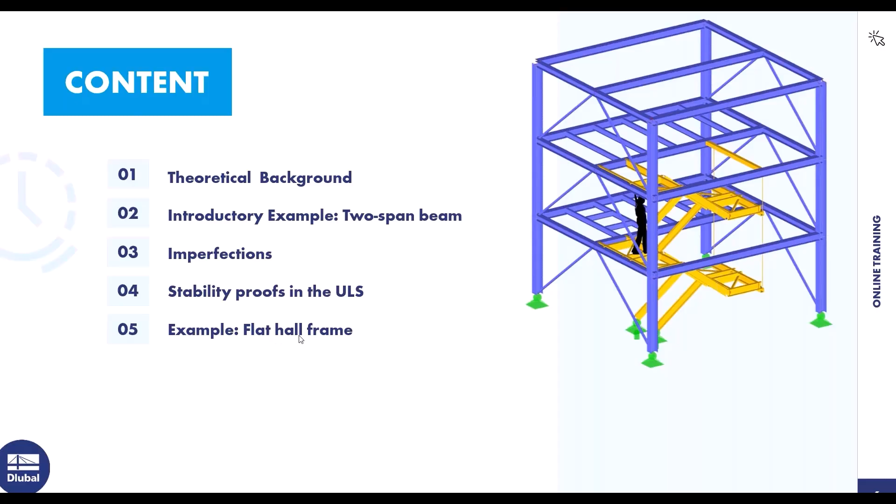So, okay. First, I'll say something about the products for the design according to EC3. The most important add-on is the Steel Design add-on. With that add-on, you can design steel members according to international standards like Eurocode, AISC, and so on.

We calculate or design according to Eurocode today. Then there's the add-on Torsional Warping. With that add-on, you can consider the 7th degree of freedom and the torsional warping. Then Steel Joints - with that add-on, you can analyze steel joints based on the finite element method.

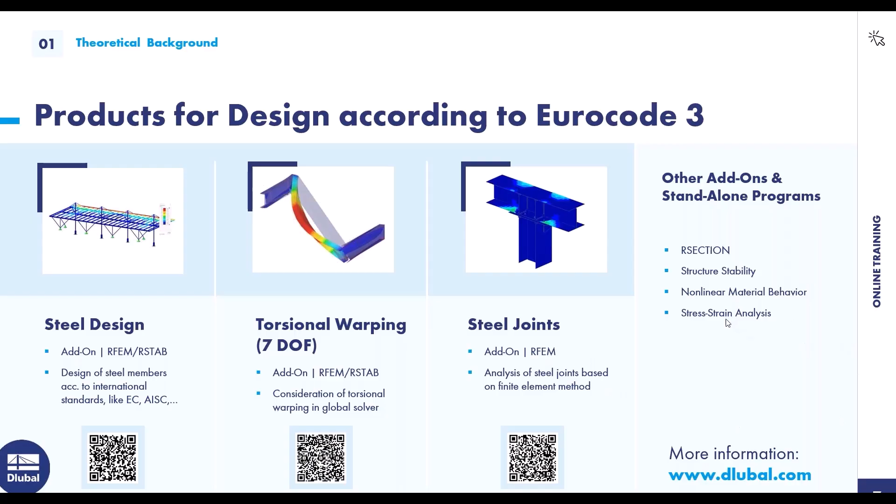Then there's the cross-section program, RSECTION. Then the add-on Structure Stability - we use that add-on in the second example. Then there's the add-on Nonlinear Material Behavior. You can, for example, consider a plastic design of steel plates and so on. And then there's the add-on Stress Strain Analysis.

Okay, then a little insight into the whole safety concept in steel construction. The actions should always be smaller than the resistance. Those are the actions, this is the resistance. And in addition, we have certain coefficients that we have to take into account depending on what type of proof is used. You can see the different coefficients here, and those are the coefficients for the German national annex.

You can see there is, for the stability analysis, another coefficient, the safety coefficient. But if you select the German national annex, for example, or another national annex, this coefficient is considered automatically by the program.

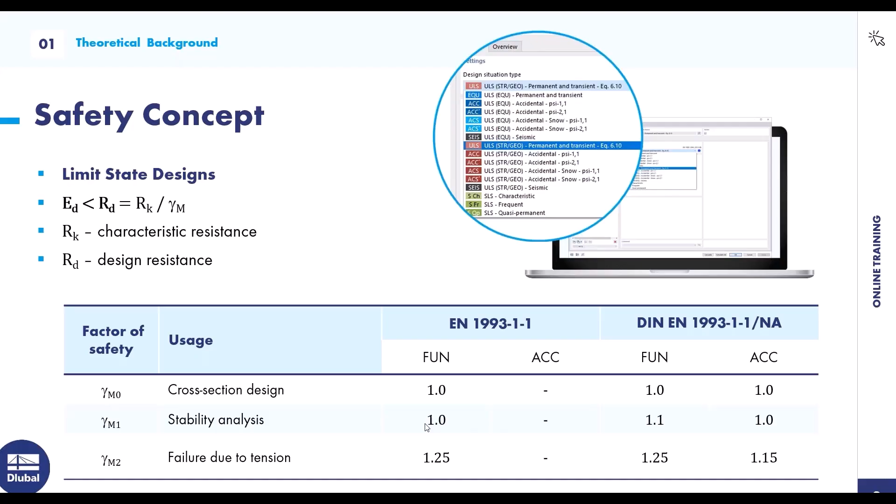So, okay, then the next slide. Elastic or plastic global analysis. Whether an elastic or plastic calculation is possible always depends on the cross-section classes. There are 4 cross-section classes. In the first cross-section class, there is a high rotational capacity, and this allows a plastic structure calculation.

Now, for example, you can consider plastic hinges, but it's not so often used in practice. And the cross-section resistance can be applied plastically. Cross-section class 2, where there is a low rotation capacity, allows an elastic structure calculation. And as with cross-section class 1, the cross-sectional resistance can also be applied plastically.

The first and the second cross-section class, where you can consider a plastic cross-section resistance. Then cross-section class 3 and 4 allow an elastic structure analysis, and the cross-sectional resistance can only be applied elastically. For cross-section class 4, only a reduced cross-section resistance, the effective cross-section.

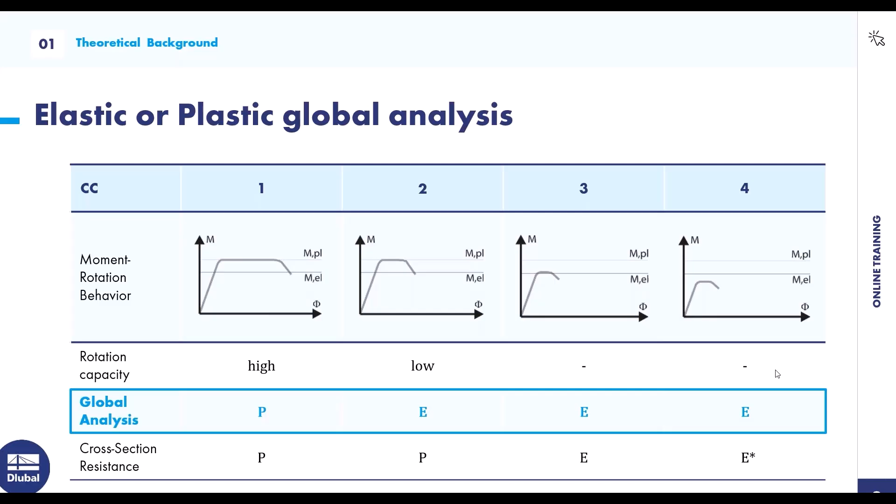That's the first example, the two-span beam, with a field length of 12 meters left and 12 meters right. A beam IPE 550, steel S235, a self-weight load case, and a load case with an imposed load. And we will calculate or do a cross-section classification, cross-section design checks.

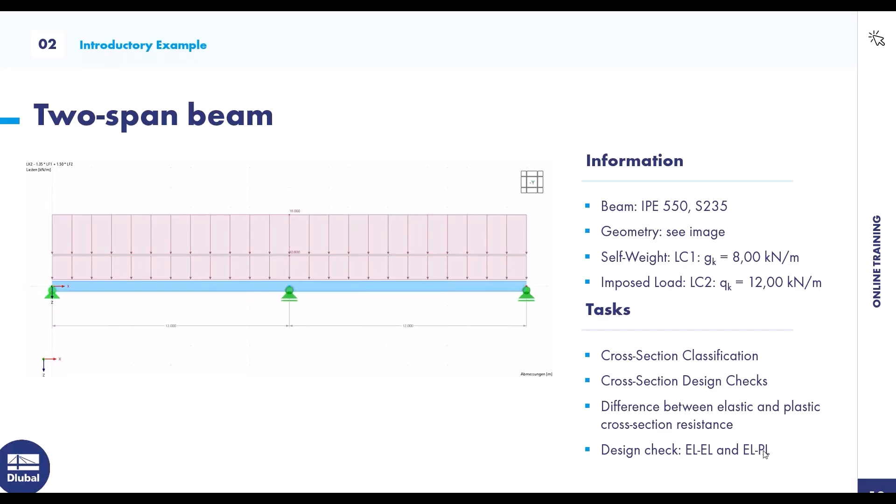The difference between the elastic and plastic cross-section resistance. We take a look at the design checks: elastic, and elastic-plastic. Okay, I turn to RFEM. That's the second example, it's already prepared. But for the first example, I model the complete structure. File, new.

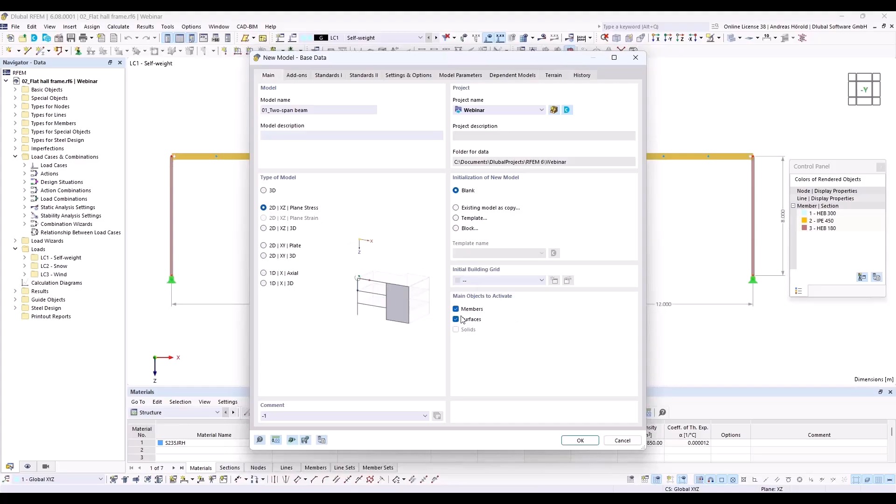So I enter 01 two-span beam. Then type of model 2D is sufficient. We consider only members, but you can also select surfaces. That doesn't matter. And we select the steel design add-on.

Then we need to select the standards. You can see there are, for the load case classification and the steel design, different international standards. We select the Eurocode, and for today we are in Germany here, we select the German National Annex.

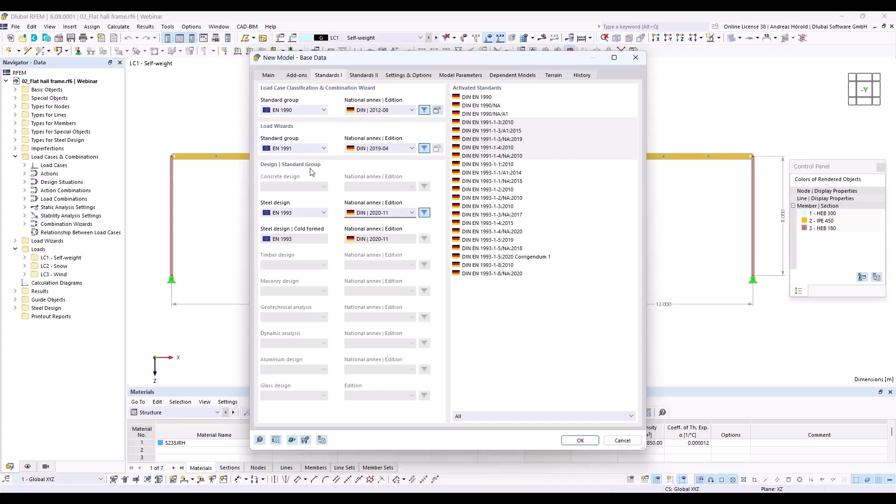We don't use the load wizards, but we use the load case classification and the steel design. We leave the dialog with OK.

So I turn to the view -y, move it a little bit. So the grid is 1 meter. I leave that. If you want to change that, you can click on this here at the bottom, display grid, right click and then edit. And you can change the space for the grid points.

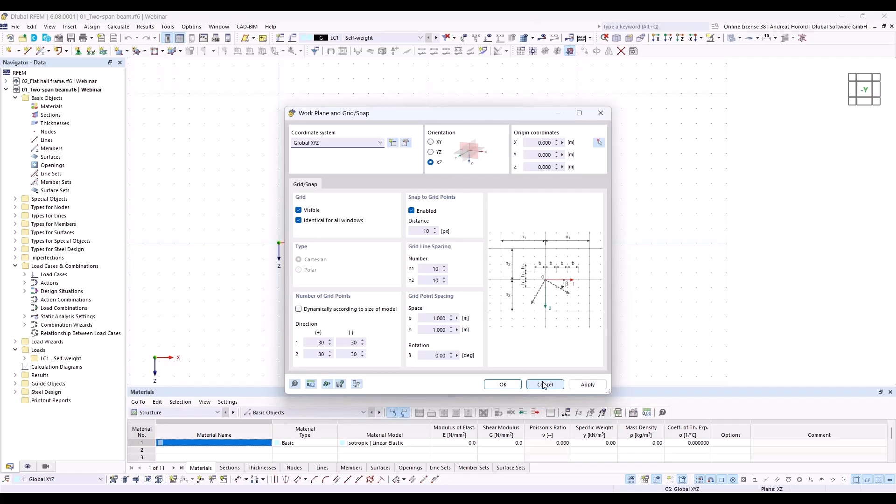So I start with the beam. Here, left above, new single member. I need to define a section. Create new section. I turn to the library.

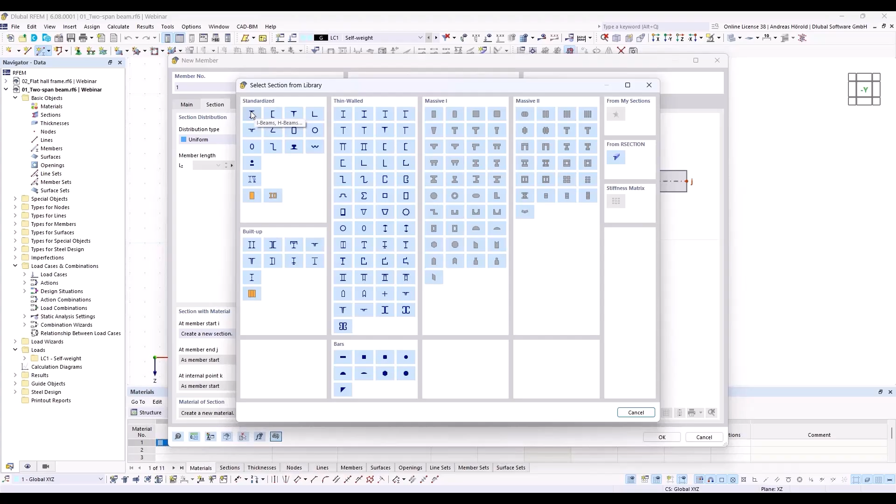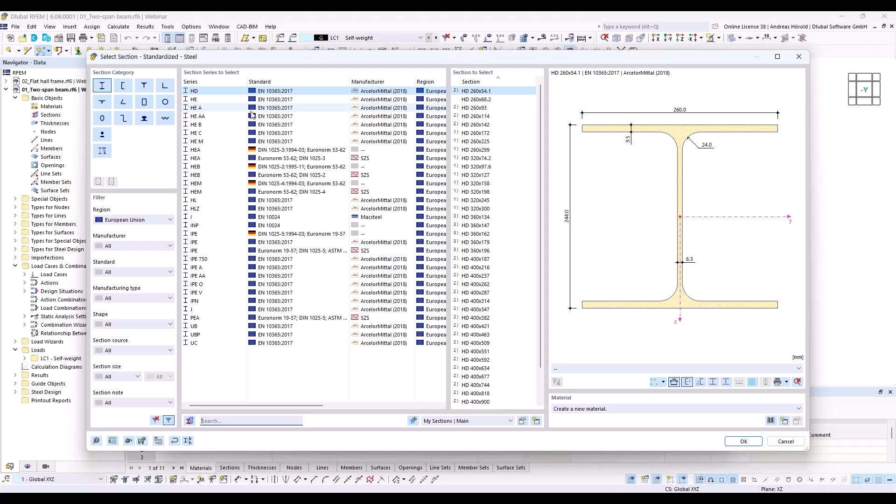Left above, an I-beam. If I am too quick for you, that doesn't matter. There is a recording. When you want to enter the structure by yourself, you can use the recording and the finished models. In the next days, you will get an email with the recording and the models and so on, the PowerPoint slides. Just take a look at what I show.

That's sufficient. Okay, I select IPE 550, and right at the bottom I open the material library and I select European Union, steel, carbon steel.

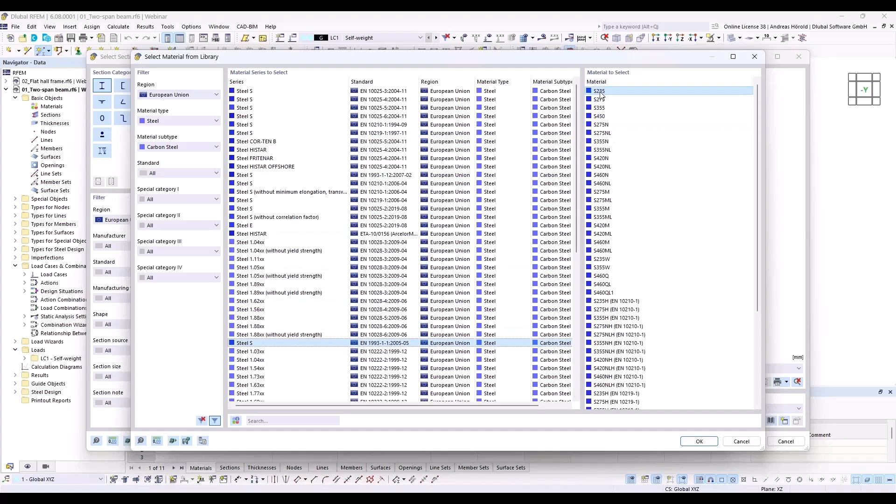There are a lot of steel materials. I use the steel material S235. Okay, you can see now the color is blue. That's okay.

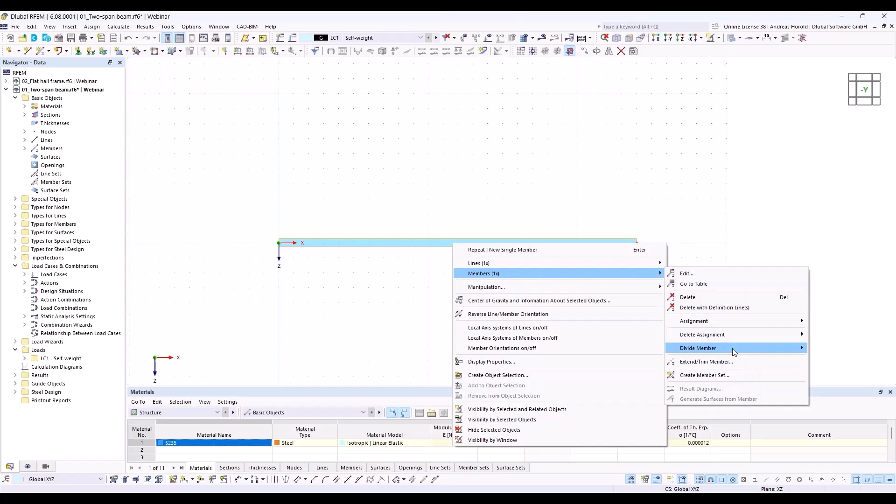So I create a member with a length of 24 meters and I divide the member in the middle with right click, members, and divide member and intermediate nodes. One intermediate node, and that I create the node without dividing the member. I select this option here, create on member nodes without dividing member.

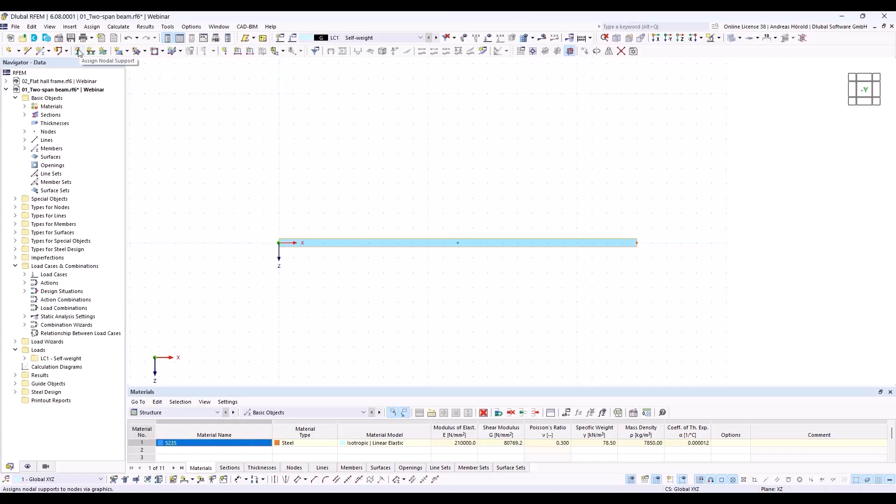Okay, there's the node. So then I create the supports. Here left above, assign nodal support. So I press the edit button to take a look if all is okay. Yes, we support in an X direction and in Z direction.

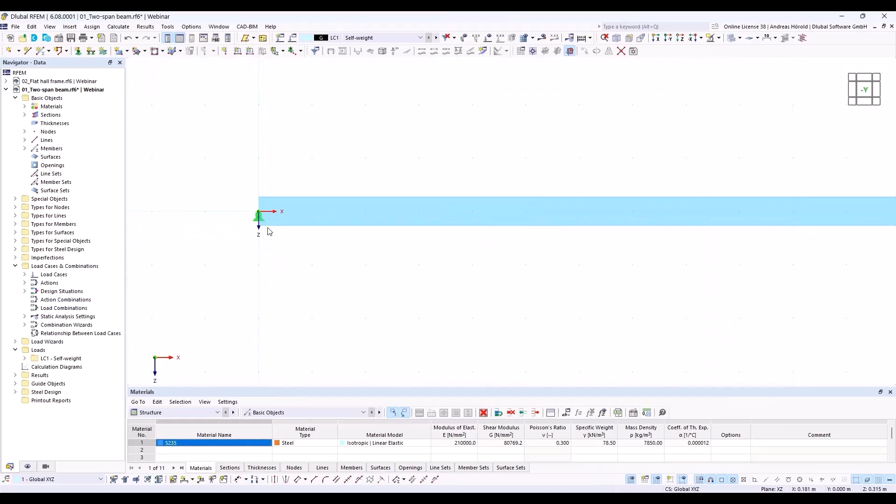Okay, and this node is quite a little bit small. With a right click, I can increase the size of the support. Okay, that's enough.

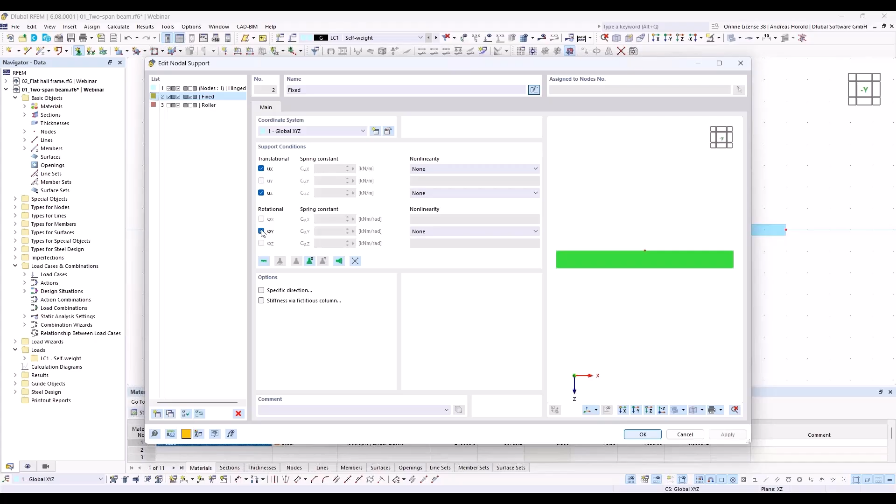So next support, I select the second support and press the edit button. We don't want to fix the rotation for the support, and we deselect the fixing in X direction. We only want to support the member in Z direction. Okay.

So that's all for the model. I create the loads. There's a self-weight load case. I select the edit active load case. The self-weight load case is automatically created for every model. So, and you can see also the self-weight of the structure is activated. That's correct in our case.

So, and above, this button, new member load. And our load should be a force, uniform. You can see there are different options. And the load direction should be in Z direction, in this direction. So and the load magnitude should be 8 kilonewton per meter.

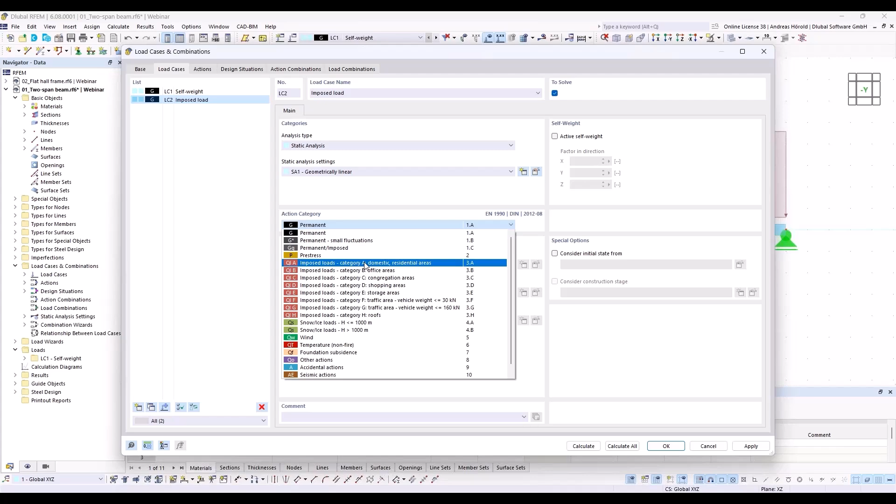Okay. So then I create a new load case with that button. I call it imposed load. And I select the action category, not permanent, but imposed loads. Okay.

Okay. Then I have to create the load for this load case, new member load, and this time 12 kilonewton per meter. Okay. That's all for the model and for the loads.

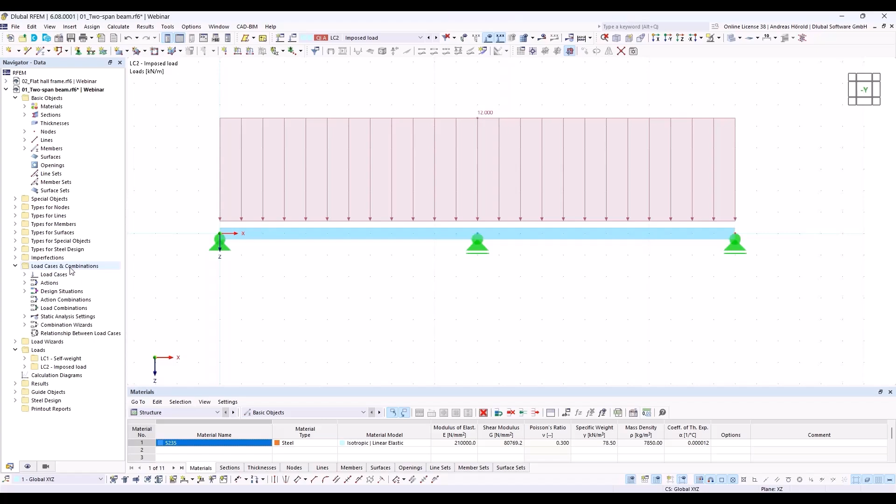I open the load cases and combinations dialog again, this time over the navigator data with a right click. Load cases and combinations. There are the base data. Now, at the beginning, we selected the standard group Eurocode and the German national annex, and we activated the combination wizard. Those are my two load cases.

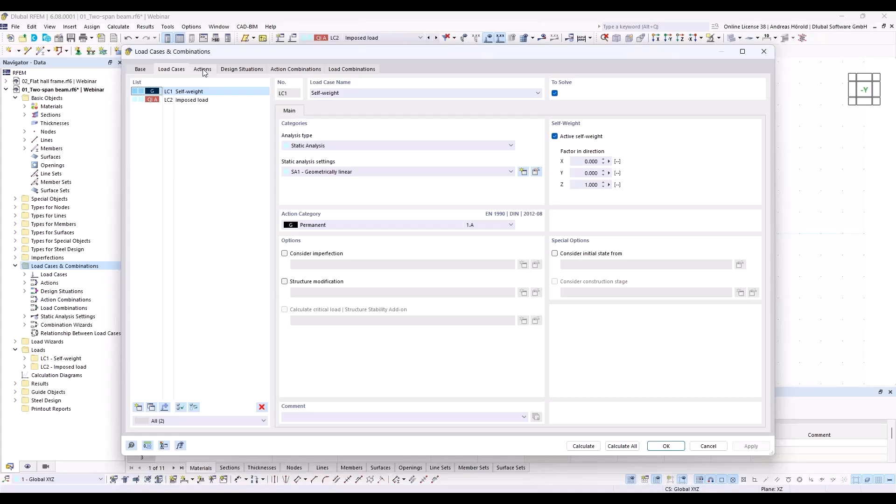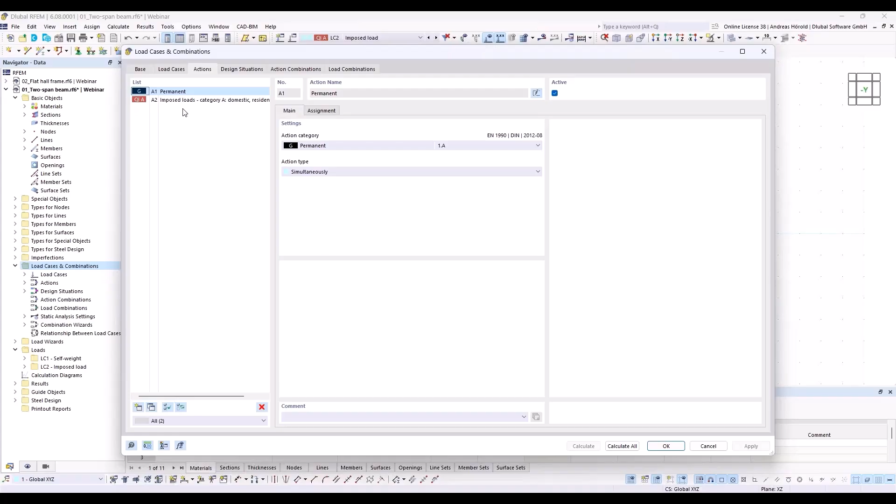We've got only two actions. Now, that's quite important when you have, for example, 4 wind load cases. Then there's only one action for the wind load cases. And yeah, you can combine in the load combinations either wind in -x or wind in +x and so on. Okay.

So then there are the design situations. We would like to design only according to ultimate limit state. That's why I delete the design situations for the serviceability limit state. And what's important, we need to activate the steel design.

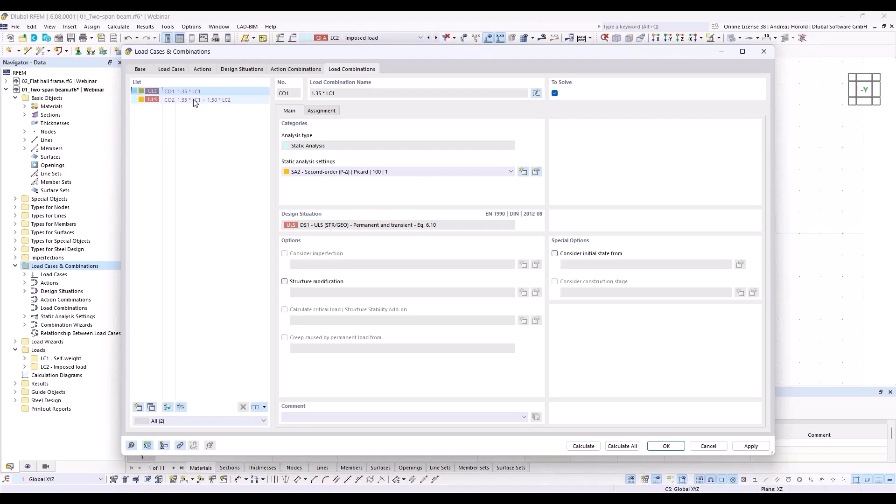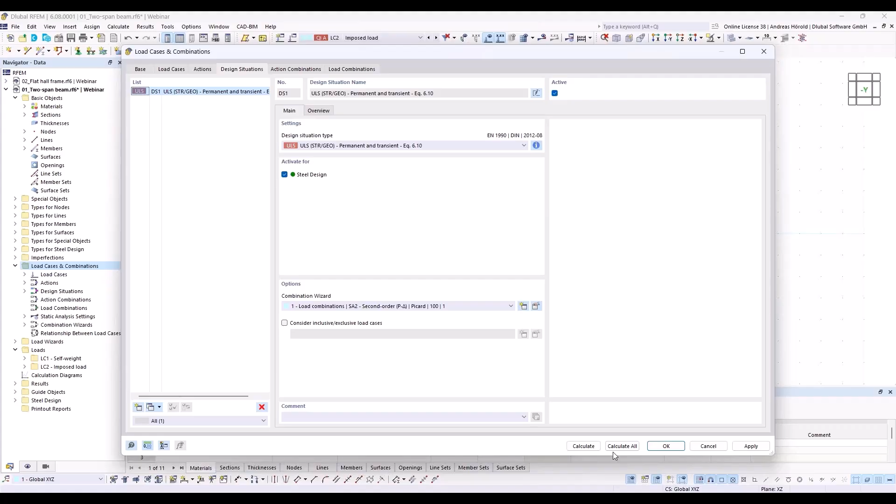So, and there are only 2 load combinations. And if I turn back to the design situations and to the overview, there are assigned these 2 load combinations for the design situation, ultimate limit state design. So then we can calculate also the steel design.

At first, we take a look at the internal forces and the navigator results on the left side.

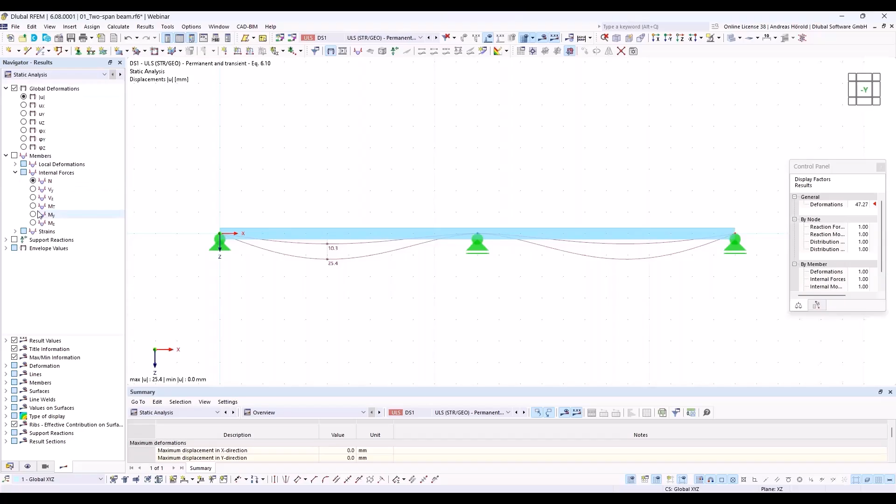The VZ, for example, I can also select only the maximum values, not minimum and maximum. So VZ and MY.

So, and then we can go to the table at the bottom and to the steel design. An error is displayed after the calculation. This is because we haven't made any steel design settings yet. We are only interested in the cross-section verification here. Therefore,

we change to the table design ratios and members. So there's the section proof for shear and for bending, and you can see a plastic design was done for the program.

So if I select the line and press this button, design check details, this dialog is opened. Students' request for a detailed presentation of the proofs is now possible. You can see the equations and where you can find it in the standard.

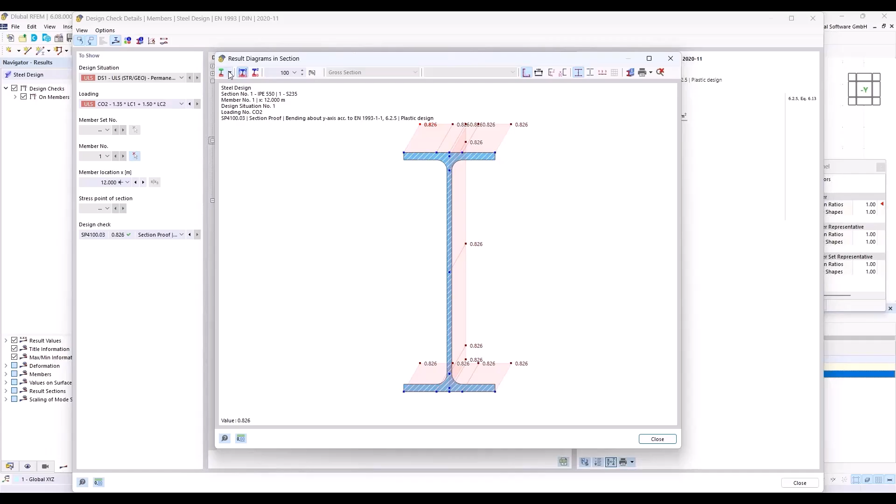So we can also take a look at the result diagram, the design ratio, the stresses. That's the stress in the middle, or over the middle support, and where is tension at the top and compression at the bottom of the cross section.

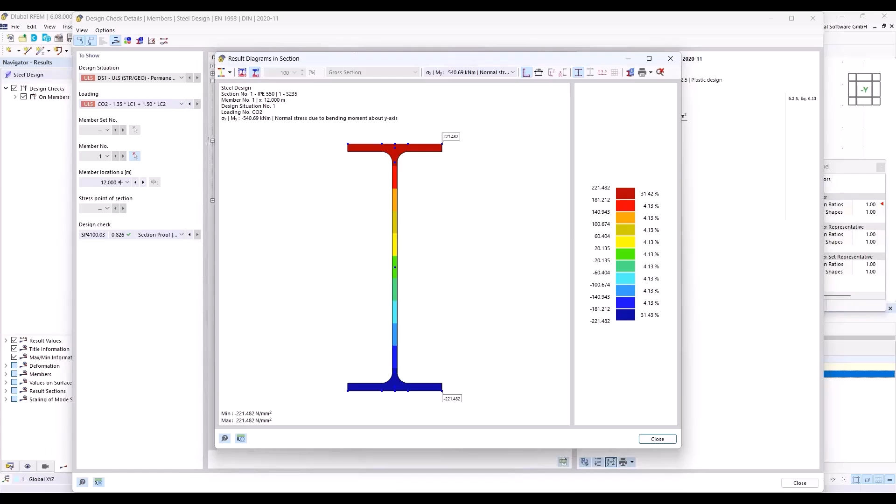So yeah, okay, that's all. Can I show also maybe the cross section information, the stress points, the different sub panels for the cross section classification, the C to T parts. Okay,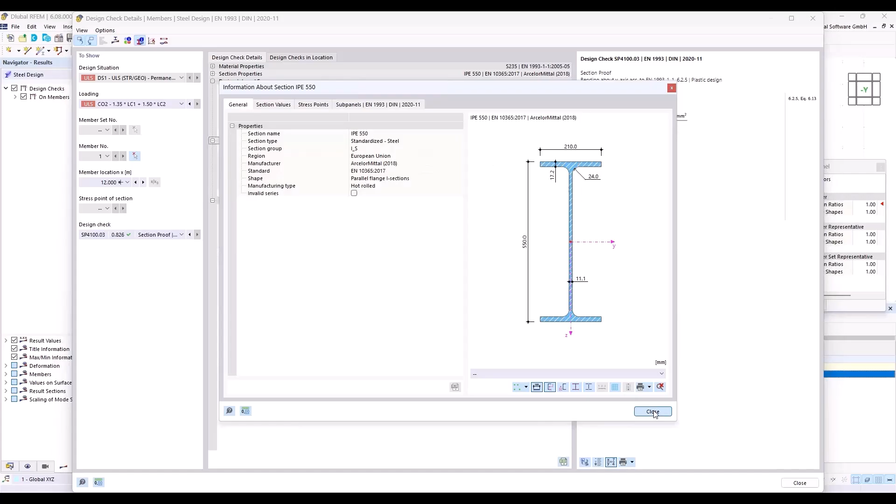that's all. Yeah, and the same, you can also, if you want to check the proof for the shear, either press that button or double click on the line, and you can see the equations from the standard.

Okay, now we don't want to do a plastic, but an elastic design. How to do that? I turn left at the bottom to the navigator data.

Then I open the steel design folder and the ultimate configurations, and I double click on it. Yeah, and then I can, for example, uncheck the stability design. Then this error message doesn't appear, but it doesn't matter.

I select that button here: elastic design also for class 1 and class 2 sections. It's allowed to do a plastic design for class 1 and 2, but in this case we would like to do an elastic design also for the cross-section class 1. In our case, the cross-section is cross-section class 1.

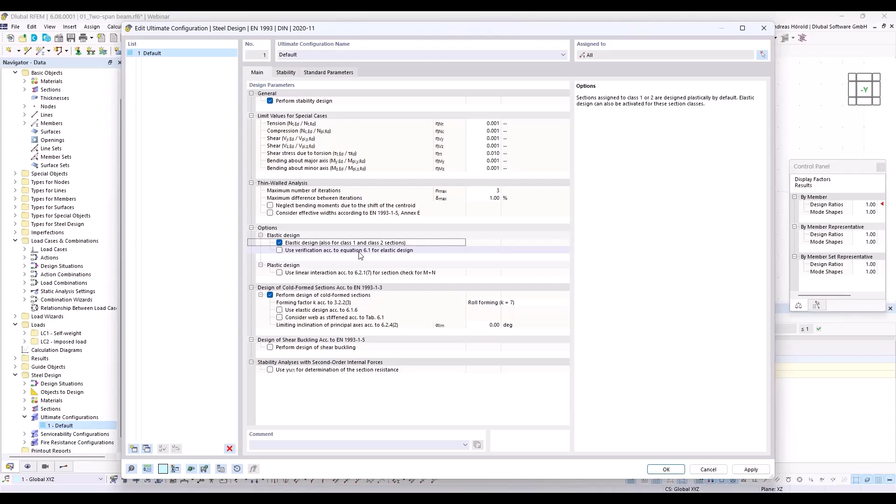Okay, we calculate or rerun the steel design again, and I select design ratios and members. I remember we had a design ratio for the plastic design of 83%, and now we have got 94%, because we do an elastic design. And if I double click on it, I can see the equation.

Okay, what you can hold in your mind is that we can do every time an elastic design. We can consider the elastic cross-section resistance. That's what we did in the second step, in that step here.

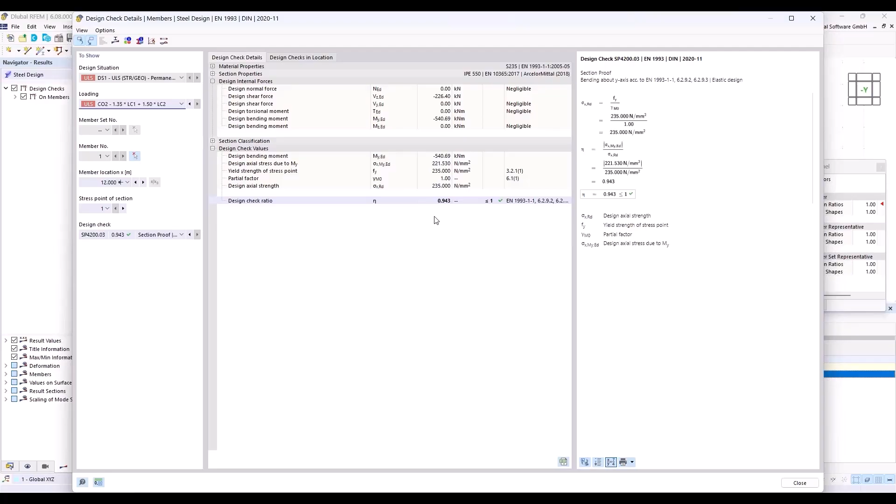So we have now learned how to carry out a cross-section check and how to take the elastic and plastic design into account: first the plastic design, in the second step the elastic design, because elastic design is allowed for all cross sections. And in addition, we now know how to display the design formulas and compare them with our own manual calculation.

Then we turn to the next topic for today: effects of deformed geometry of the structure.

In the first training course, Introduction to Member Design, it was learned how the results can differ between the calculation according to the first order theory, the geometrical linear analysis, and the second order theory. The geometrical linear analysis is an equilibrium formation on the undeformed system, and the second order analysis is an equilibrium formation on the deformed system.

In this example of the cantilever column, this effect can be seen very well on the basis of a slender and a compact cross-section. In the case of the slender column, the increase in the bending moment at the foot point is much larger than in the case of the compact column, if one calculates according to the second order theory. And there's no difference when you apply the geometrical linear analysis.

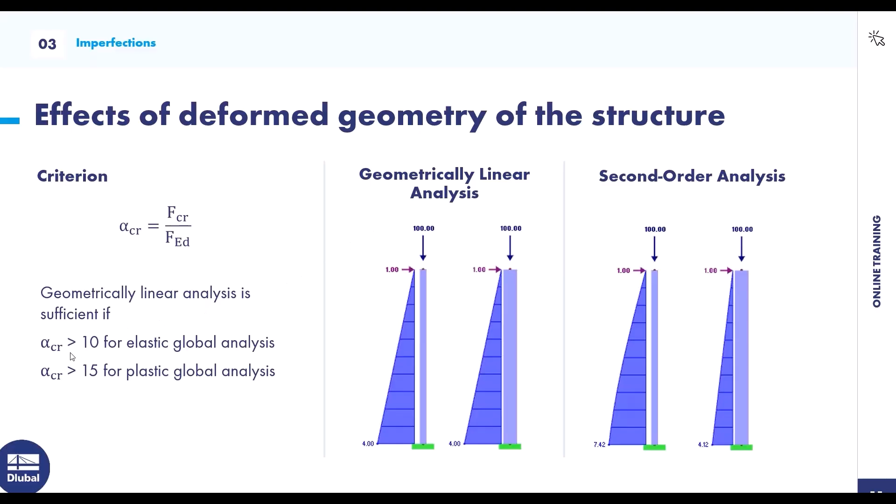Okay. So the next point is the equivalent geometric imperfections. Imperfections are also closely related to this topic. In Eurocode 3, these are generally grouped together as equivalent geometric imperfections. What are imperfections anyway? Imperfections are production-related deviations in the model geometry and/or in the material properties.

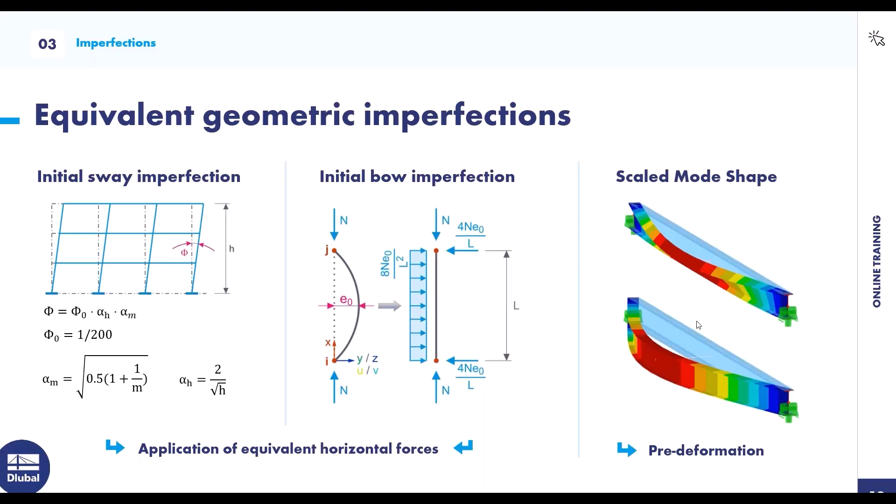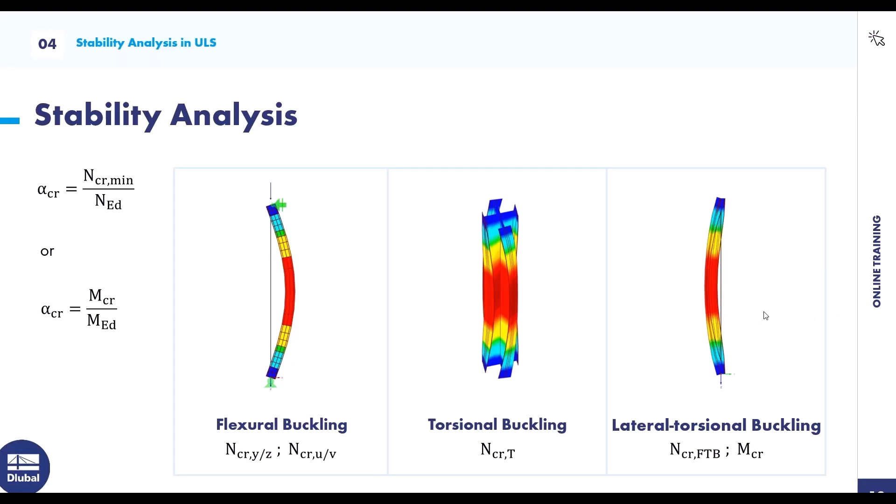Okay, methods for stability analysis. There are 3 methods. Method A: you have to apply a global and local imperfection, and the structure analysis should be done with the second order analysis. Then you can do the cross-section design checks with the internal forces.

Method B: global imperfection, meaning only the initial sway imperfection. Then the structure analysis according to second order analysis. And what's quite important, you have to consider the buckling length equal to the member length, not with a factor. SK is equal length.

Then method C: structure analysis according to geometrical linear analysis on the ideal structure, but in that case with the real buckling length.

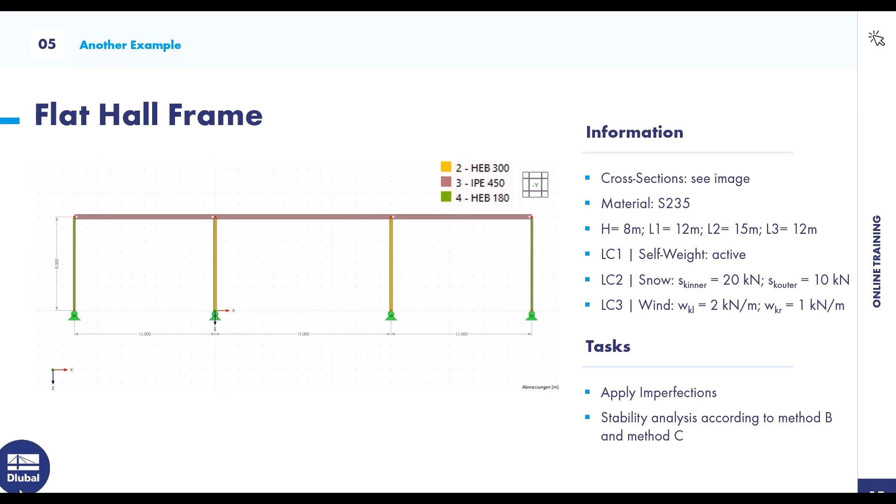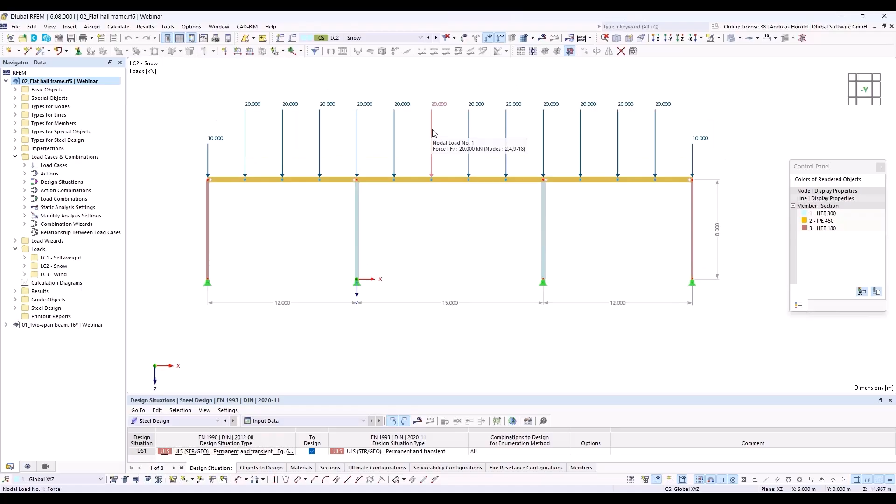So then I turn to the program, to the predefined example. So that's the construction self-weight load case, then a snow load case with loads, for example, from purlins, and a wind load case. Wind in X direction with wind pressure and wind suction.

Left above, I turn to the base data, a 2D model, and we use the add-ons structure, stability, and the steel design add-on. And we select the standards Eurocode and the German National Annex.

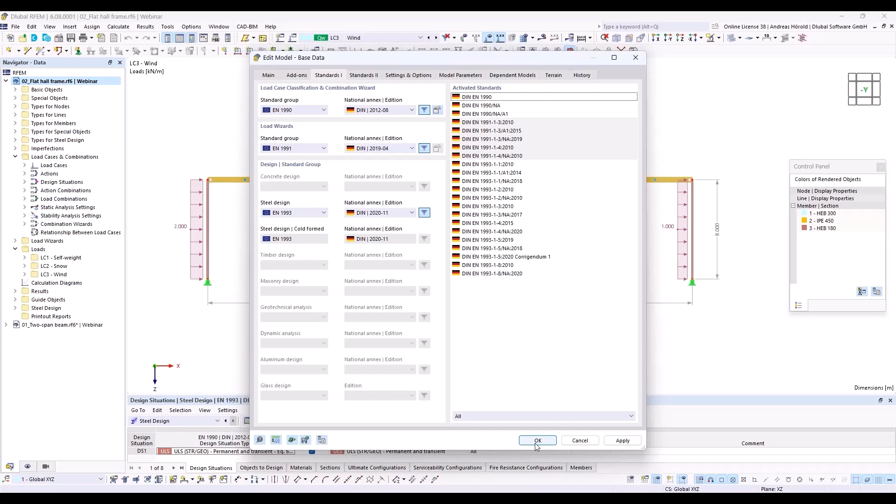We use the add-on structure stability to check whether we are allowed to determine the internal forces according to the geometrical linear or second order analysis.

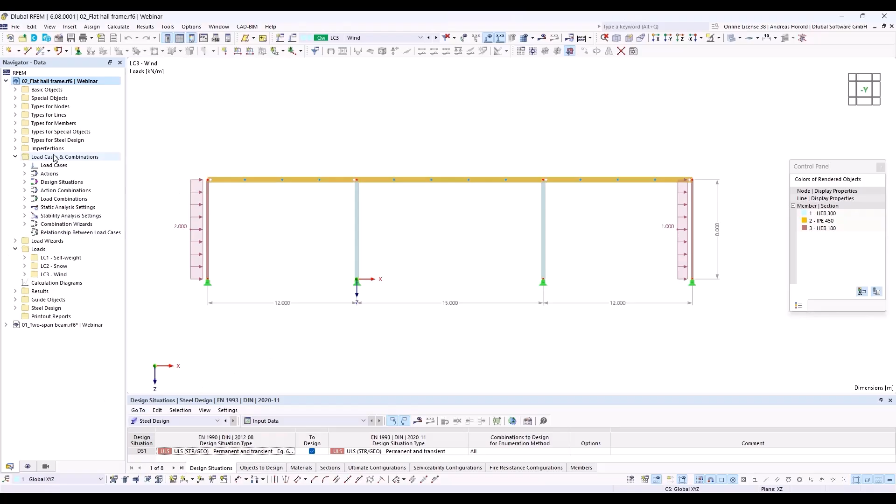That's why we turn to the load cases and combinations, and I go directly to the design situations. I select the geometrical linear analysis, and I edit that, and I activate the stability analysis. Okay, and I run the calculation.

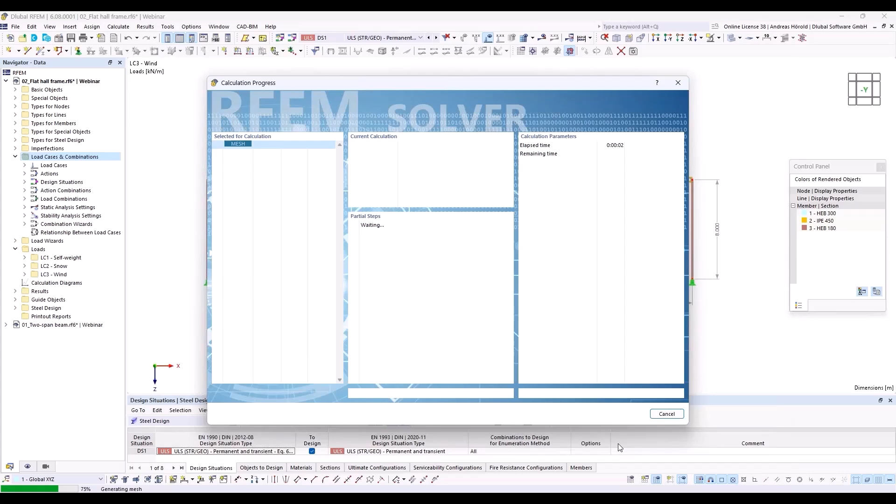After the calculation, we see the minimum critical load factor, 6.05 for the design situation, and 6 is smaller than 10. We need to do a stability design by using the second order analysis.

But what I already mentioned, for the stability design using the classic equivalent beam method, method C, the internal forces can be calculated according to geometrical linear analysis, and buckling lengths must be assigned to the columns. But for the design of the lateral torsional buckling, the application of the second order analysis is also required with this method.

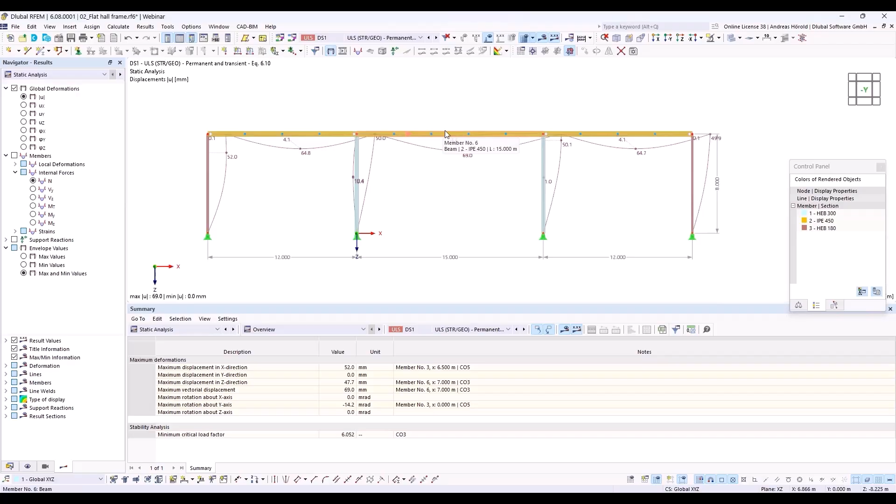That's why I switched to the second order analysis. For the columns, we consider the effect twice: one time with the second order analysis and with the real buckling length. But we need to apply the second order analysis because of the horizontal beam and the lateral torsional buckling.

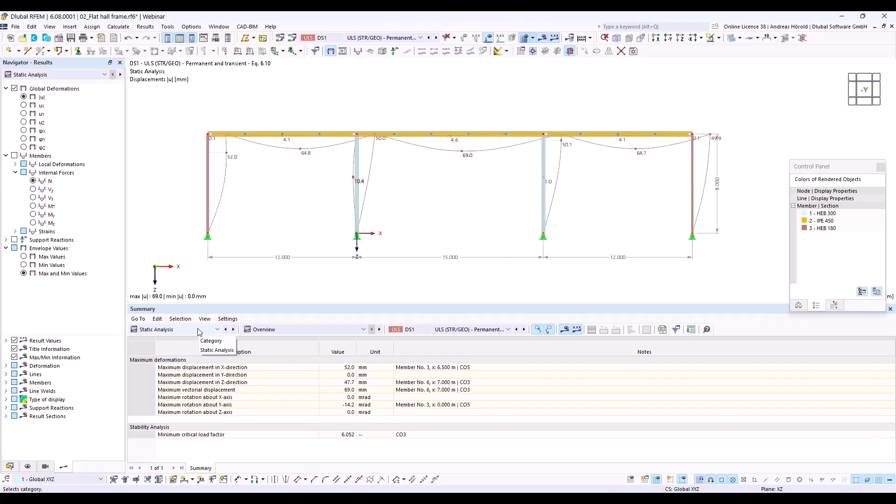But let's take a look first at the buckling length. I turn to the stability analysis, then results by member. It was combination number 3. So then I can see the effective lengths and critical loads by member.

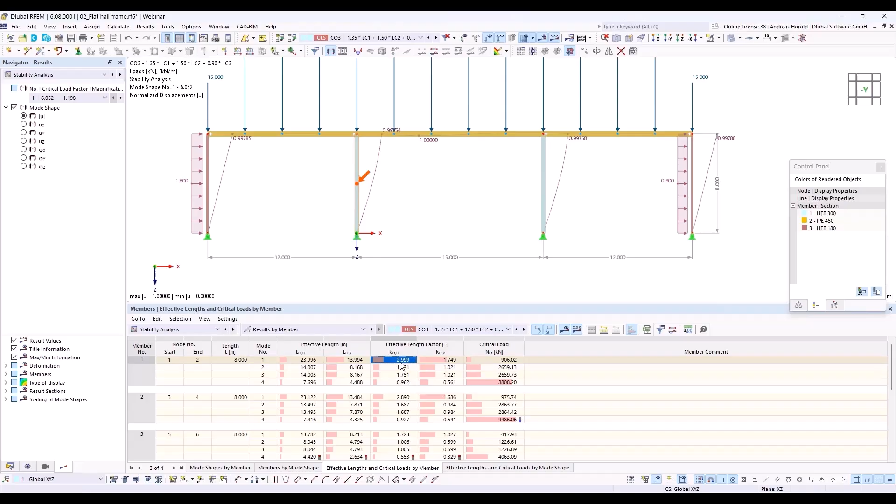This column has an effective length factor of 3. This column, we apply also 3 for this column. And for the left and the right column, 1.72.

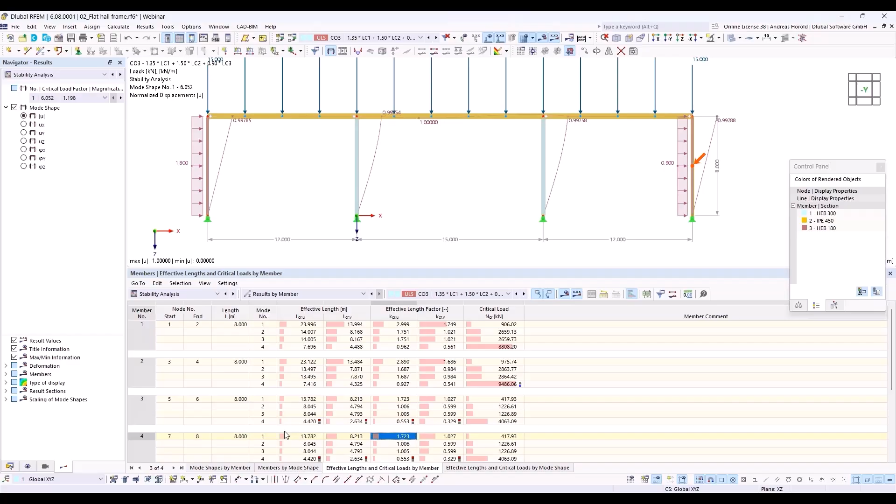So I turn back to the design situation and we run, or we use the second order analysis. Okay, that's okay.

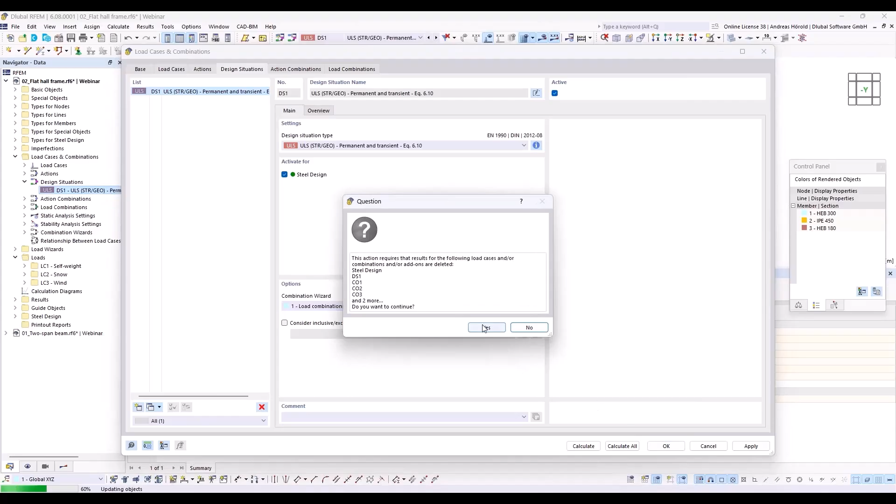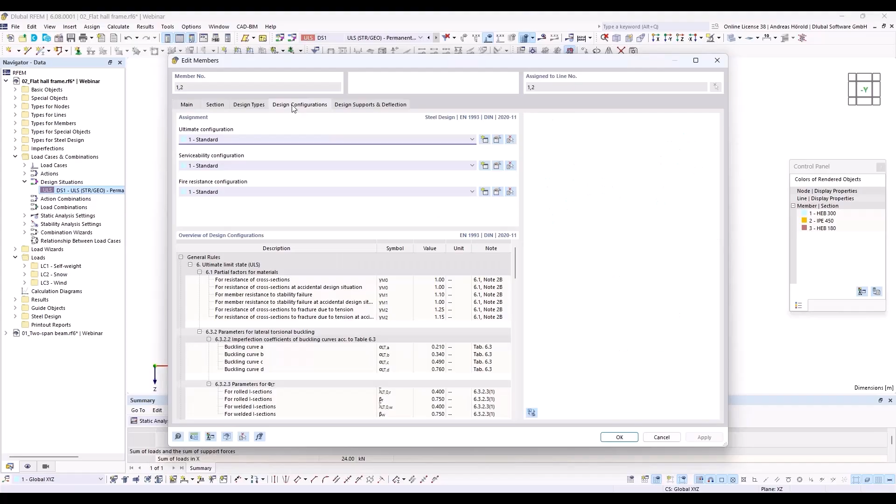So now we apply, we define the effective lengths, or we assign them to the columns. I select the inner columns, then I do a right click, members, edit, and I turn to the design configurations and design types, and I define effective lengths.

I would like to mention that you can also import the buckling length from the stability analysis. Now we don't do that in this example. So then nodal supports and effective lengths. I define the effective lengths of 3 meters, the effective length factor of 3.

Then I select the left and the right column. I press the control key. You can see the plus sign. I would like to consider or select both columns. Then right click, members, edit.

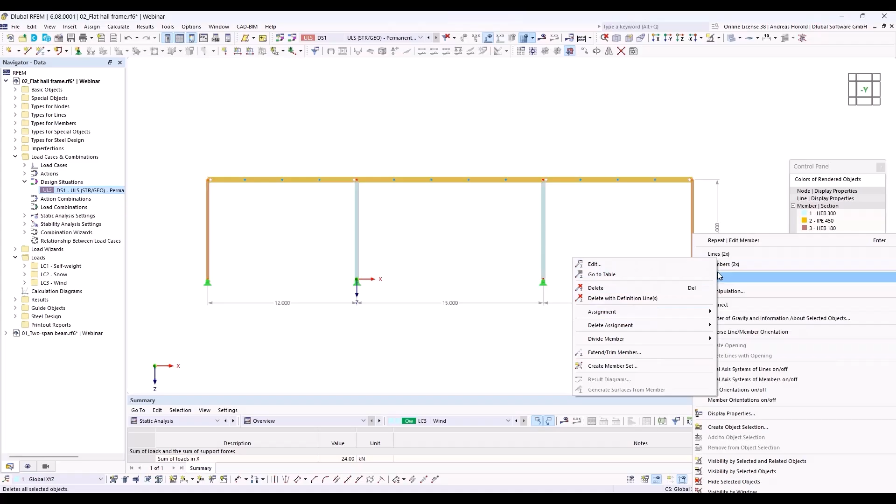The same procedure, design types, effective lengths, and 1.72.

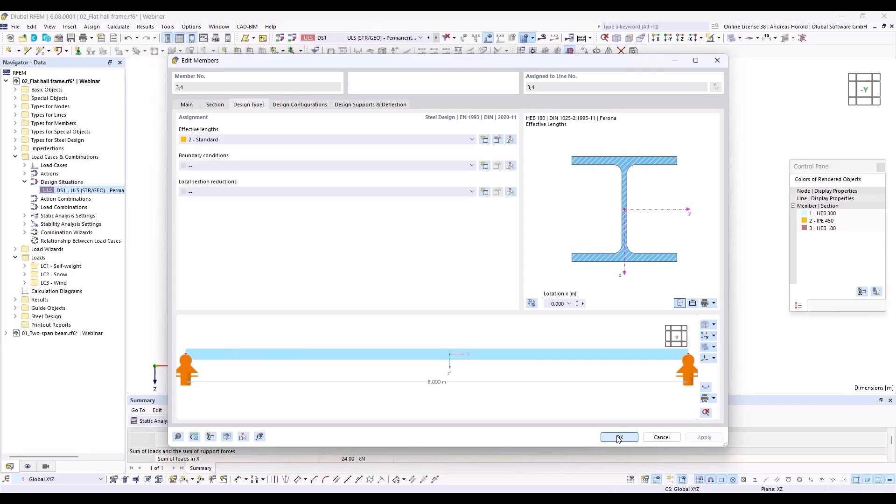And you can display the effective lengths. Then we go to Navigator, Display, then types for steel design, and I select member effective lengths. And you can see the factor 3 and 1.72.

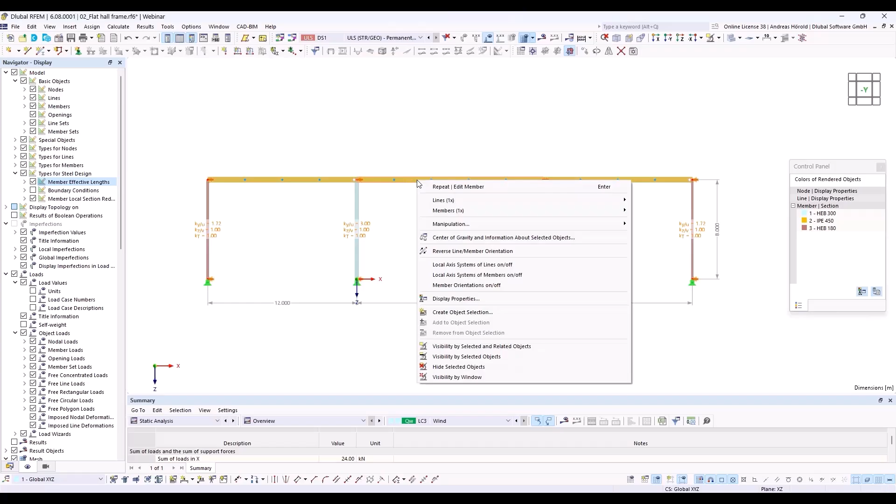So then I select the inner horizontal beam by right click, members, edit, then design types, effective lengths. I create a new effective length.

So this time we would like to consider the horizontal supports, for example by purlins. I press this button here, select member or member set. I select this member, and the program will detect all these nodes here. You can see that here. And we would like to fix it in horizontal direction.

I would like to consider that the upper flange is supported, since the purlins lay over the horizontal beam. That's why I select all these lines here, and I define eccentricity type at upper flange.

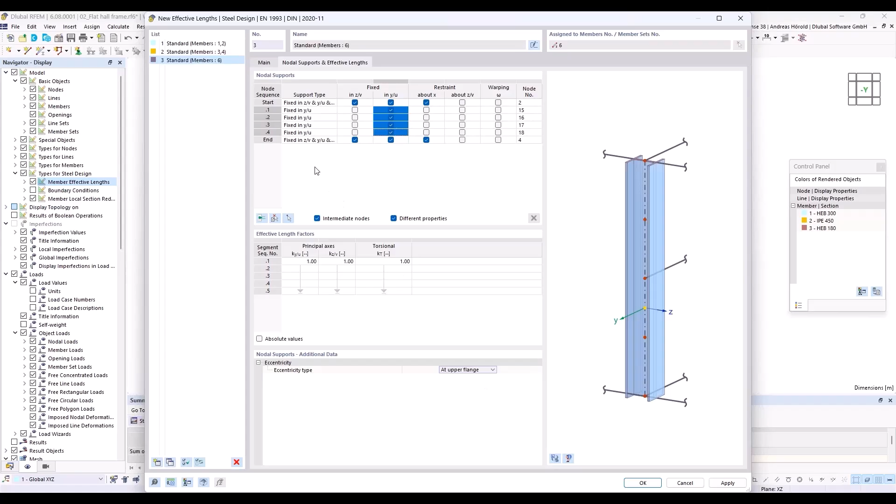I can leave the dialog and you can see the supports. Fork support at the beginning and at the end. And for the inner nodes, there is only a horizontal support at the upper flange by the purlins.

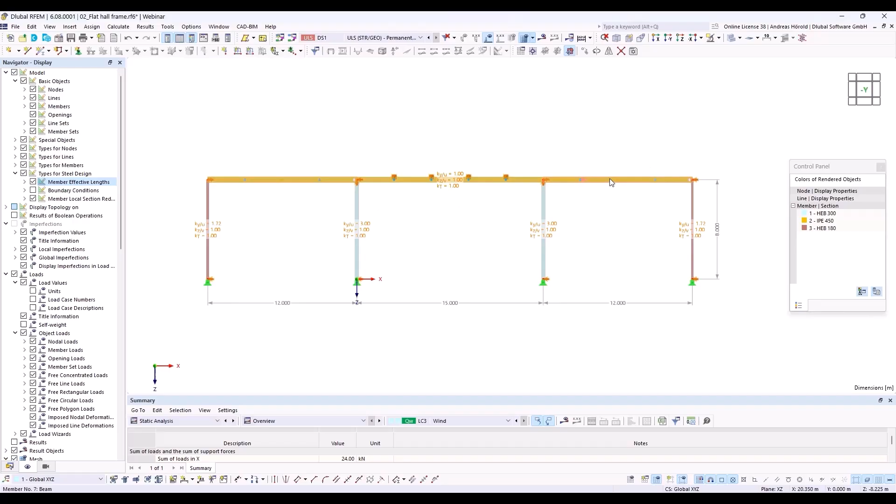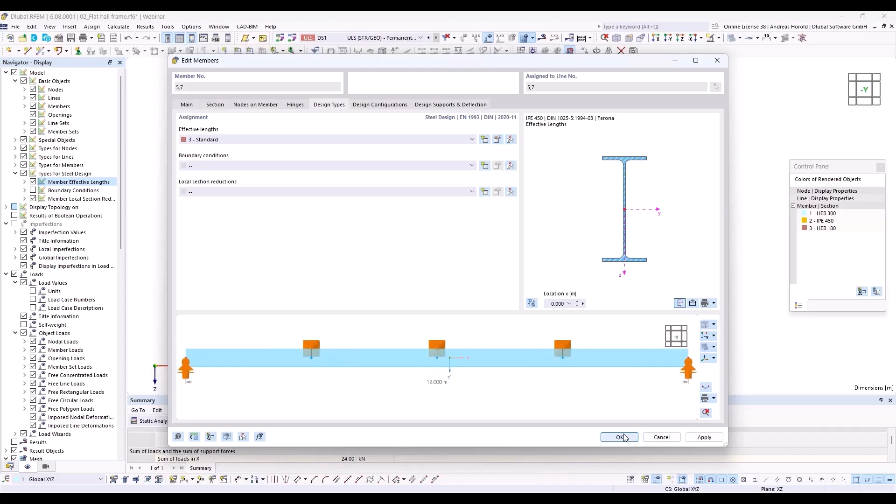Okay, then we can run the calculation. I turn to Steel Design and press this button, Show Results, and the calculation starts. So the calculation is done.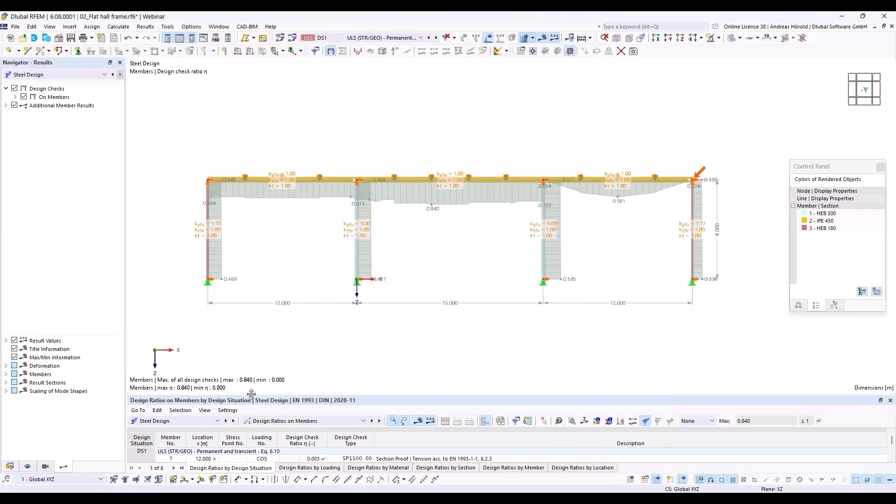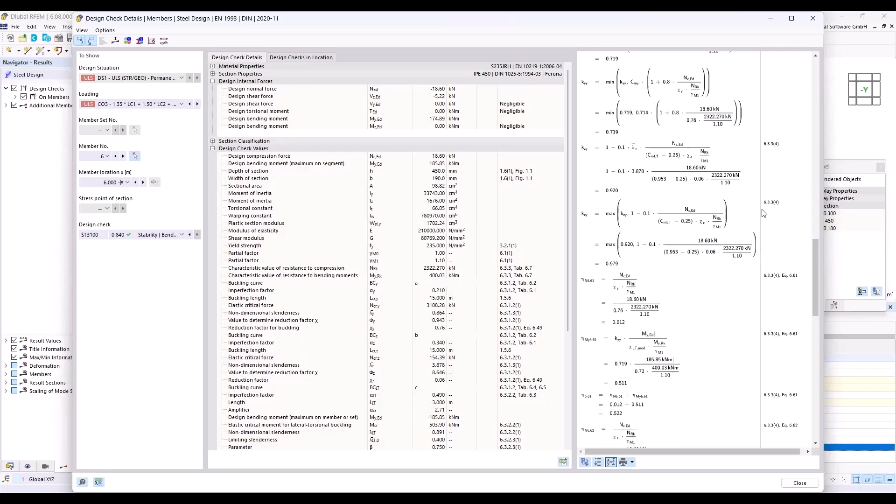We have a maximum design ratio of 84%, stability, bending, and buckling about principal axis. So I can double click on it and you can see the design checks, the equations, and where you can find it in the standard.

This was the classic structural component design, method C, without imperfections but with effective member lengths. Now we want to examine the model using the approach of global imperfections and the structural component design method B.

I turn back to the PowerPoint. We did method C, with the effective member lengths and without imperfections. Now we define imperfections, and I delete the effective member lengths for the columns. We consider SK equal to member length.

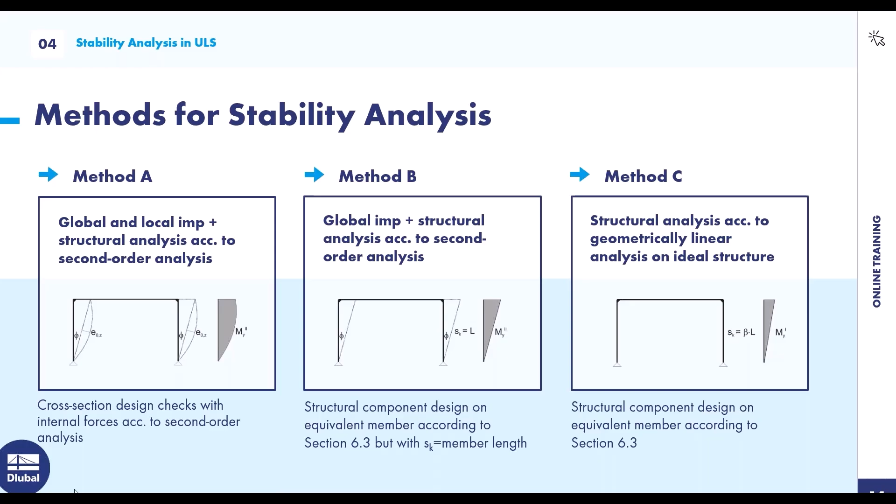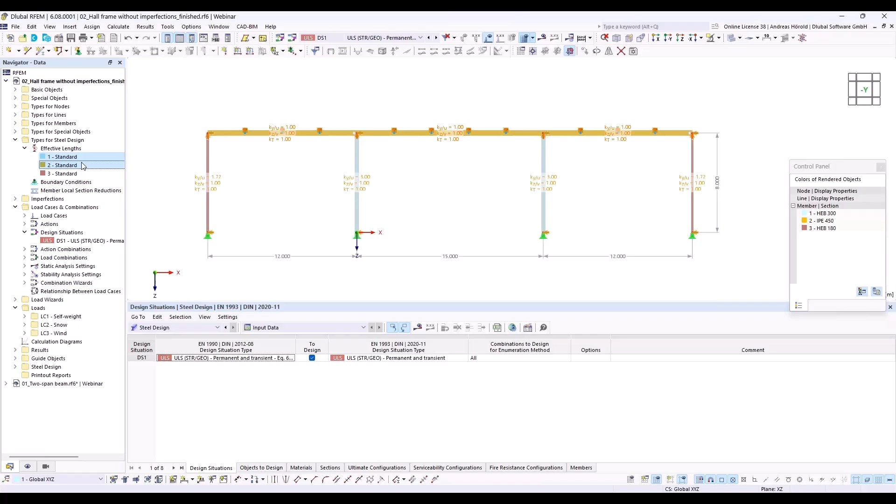And now I delete the effective member lengths, or the buckling lengths, for the columns. Delete. Okay.

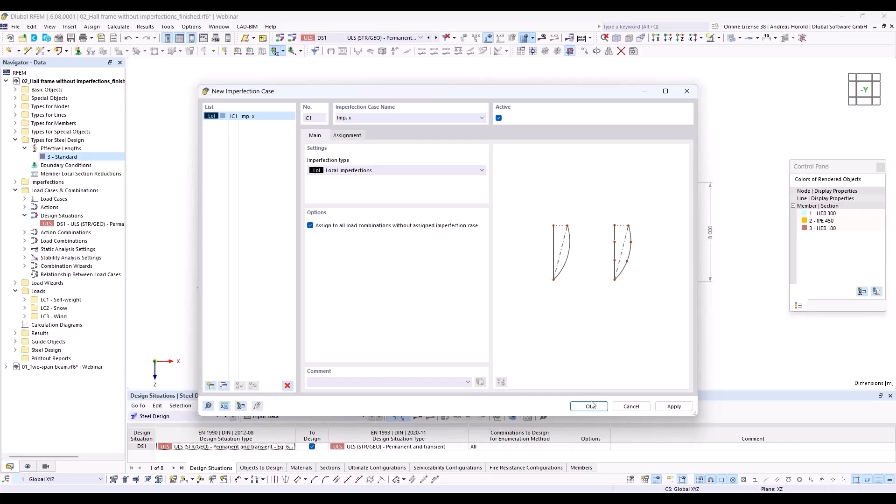In the second step, I need to define imperfections. So above here, that button, new member imperfection. I have to create an imperfection case in the first step, imp x. We have got imperfections and imperfection cases. You can consider more imperfections in one case, that's why we have imperfection cases and imperfections. That's the case. And now we create the imperfection for that imperfection case.

We define an initial sway, type is Eurocode 3. The imperfection direction is Z, the strong axis. The basic value is 200. I can measure the structure height, 8 meters. Number of columns in one row, those are 4. The reduction factors are calculated automatically.

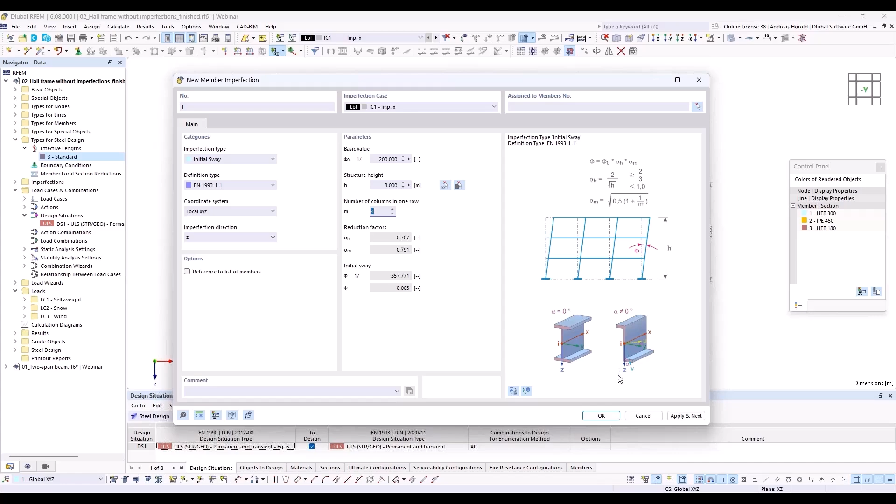I need to assign it to all 4 columns. And to display it, I have to press this button above, Show Imperfections. So now we can run the calculation.

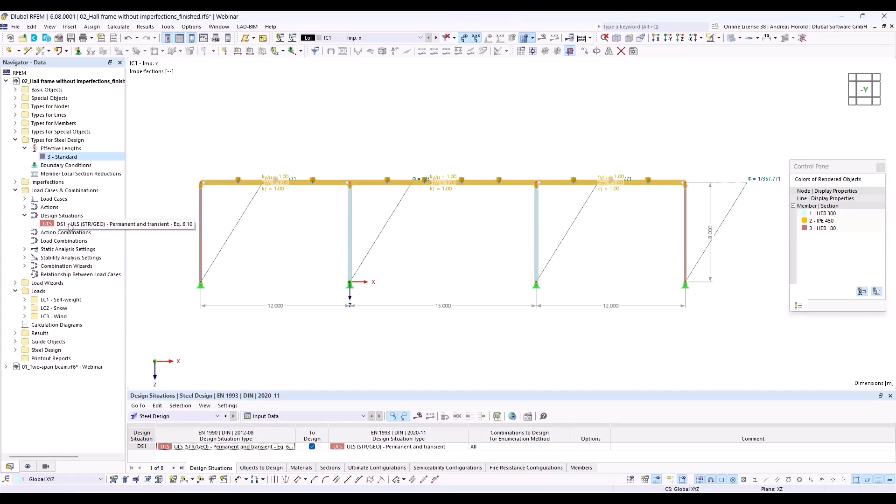Or before I do that, I take a look at the design situation, second order analysis. It must be checked that the program considers the imperfection cases. Okay, now we can calculate all.

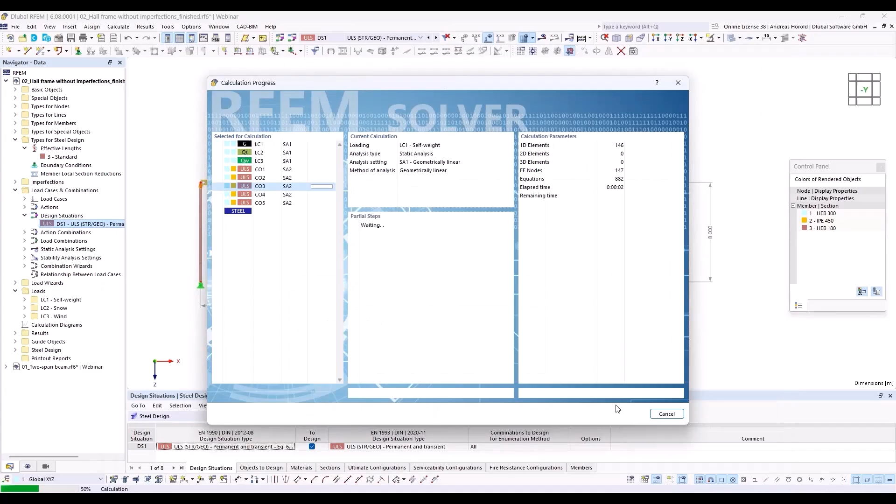Okay, that should be all for today. You learned in the second example how you can apply method C in the first step, and then with imperfections, method B in the second step.